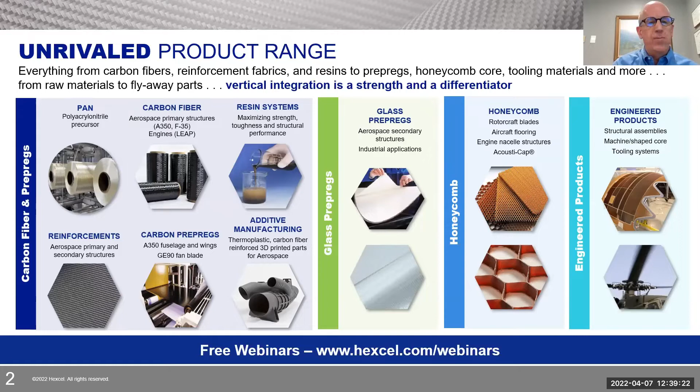And then we also build engineered structures and have two plants in Washington State. We have a plant in Burlington that is an engineered core facility where we take our honeycomb core and we shape it and form it and bond it into sandwich structures. And then in Kent, Washington, we have an engineered structures business where we build a lot of flight critical components for rotorcraft, commercial aviation, defense aviation, as well as space applications up there. And we tend to focus on very complex composite structures and have some real expertise in being able to develop that. So that's kind of an overview of Hexcel, if you weren't familiar with all of that we're involved with.

So in regards to the topic, let me first address advanced air mobility. A lot of press on this topic. You'll see it as eVTOL or urban air mobility. NASA has tried to recoin this to advanced air mobility, and it is gaining some traction in terms of that terminology. The reason that they wanted to do that is that originally it was talked about as urban air mobility, which was, as the name suggests, transportation in an urban environment. A classic example would be getting from New York's JFK airport to downtown Manhattan. And if you could do that in 15 minutes on an air vehicle versus an hour in a taxi, and if the cost were similar, there'd be an attractive market for that.

But there's a lot of other applications for this technology that is beyond urban transportation. So you think about areas that maybe are underserved; up there in the Pacific Northwest, it would be getting from Seattle to one of the islands, or Seattle to Vancouver, for example, or to Vancouver Island from Vancouver City, and so forth. Cape Cod's another market that's being looked at. So those aren't urban, but they're really just more efficient transportation. And then there's a lot of interest in this market for things like emergency transport for medical emergencies, or logistics in areas where it might be difficult to get the product there by truck, for example. So a lot of different applications.

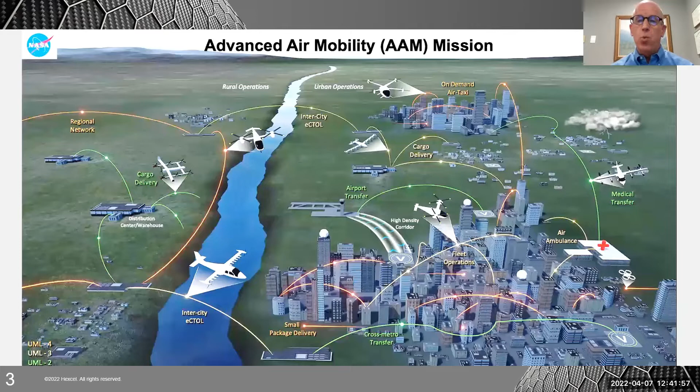As I mentioned, a lot of money flowing into this. Nobody's certified a vehicle yet, and nobody's actually purchased a vehicle. There are purchase orders in place for a lot of these companies once they certify a vehicle. But if the market develops the way the companies in this space are projecting, it will be a very large market, and it will be largely a composites market. None of these players are looking at metal airframes. They need composites for the weight efficiency, because these are battery operated, and so weight's going to be pretty critical.

There are a variety of market research reports out there that talk about the size of this market. A little difficult to predict right now because it's not a real market yet. But here's just one from one of the studies that I would say is more conservative in their predictions, showing pretty sizable growth rate, 33% market growth rate, getting up to $7 billion market by 2030.

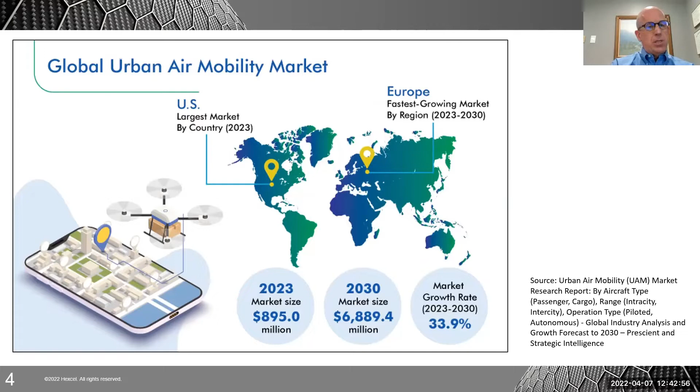There are some market research reports that show it is higher than that. But it's dependent on a number of things, as mentioned: certification, how you're going to handle the air traffic management, the business model, having the infrastructure to be able to support this kind of market. So a lot of things that still need to be addressed before this market's real. But we're excited to be part of it and to be engaged with a number of these companies out there.

Let me talk about UAV markets, because UAVs have been around for some time, but there's increased emphasis, especially within the Department of Defense, to go more towards unmanned systems. Definitely lessens the risk to pilots. The unmanned systems can be built in larger quantities, so that you could have potentially swarms of these drones out there. Even talking about some of the new fighter aircraft could be potentially unmanned, or be able to have the capability to fly unmanned. So this is kind of the roadmap from the Air Force in regards to what they're trying to put together over the next 25 years for unmanned systems.

One of the terms that now is more common in this industry is attritable. Attritable means that it's an expendable vehicle. And so a lot of focus on high rate manufacturing, low cost manufacturing, where they could pump out hundreds of these drones in a month, and to be able to support a mission with the understanding that they may only fly one mission and be destroyed after that mission, but be able to protect our warfighters and not being exposed to the danger there.

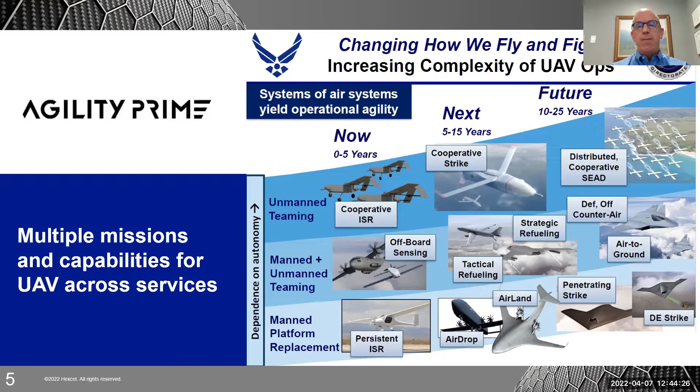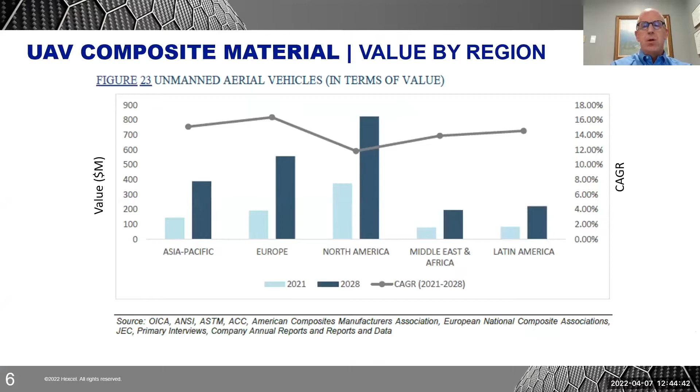So if you look at what the projections are for composite materials, here's a market research report that we purchased last year that looked at what's the composite material market potential for the unmanned aerial vehicles. And here in this chart, they've got it split out between the different regions in the world. But they are estimating that by 2028, there's a $2 billion market for just the composite materials on these unmanned systems. And you can get similar types of projections when you look at urban air mobility and even beyond a $2 billion a year market for the composite materials.

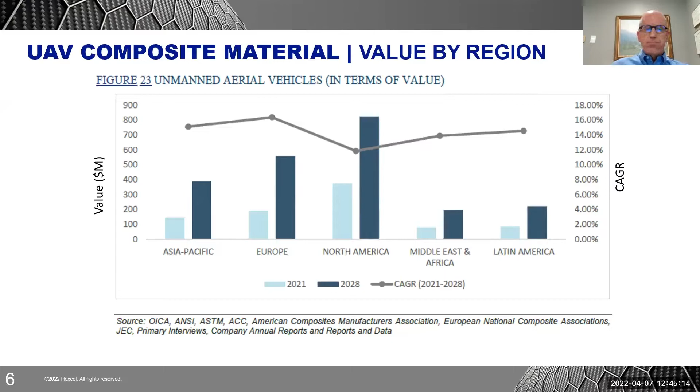So with these different markets, what we're finding is that really the mission profile is what defines the material requirements. So, for example, if you're looking at a UAV that's attritable, you're going to look at a low-cost material that can be cured very quickly so that you can pump out a lot of these in short order at low expense. Whereas an urban air mobility that's carrying passengers, they're tending to want to use established materials with established procedures on this, but are looking to the future that as this market develops, they will want to switch to high rate material systems to be able to meet their rate targets.

Some of these companies are talking about getting to rates of several hundred to possibly even a few thousand vehicles a year. So that will put different constraints on the material suppliers and the manufacturers in order to be able to meet those needs.

So here's kind of a high-level summary of what we're seeing. So on the left-hand side is the types of requirements that we're being exposed to be able to support these markets. One is they want higher build rates. As mentioned, they want to get to build rates that are beyond what we currently are used to for commercial aviation. They want lower cost. On the UAV front, they want lower cost because these are going to be expendable vehicles. On the urban air mobility, they want low cost because they've got to create a business model where it's attractive to their customer base. And as such, they need low cost vehicles.

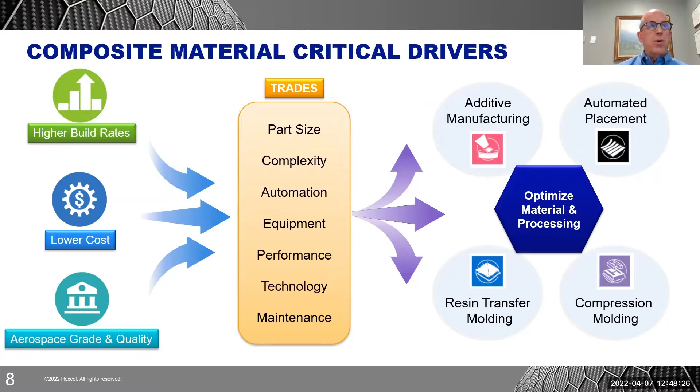But regardless if it's Hexcel or another material supplier, these are all the steps that companies have to go through, just like with any other certified air vehicle. And I'll go into some of these in a little bit more detail as we go forward. So first on this material selection. Obviously there's the common material properties, stiffness, strength, toughness that are required. A lot of these companies are startups, and so they're still actually defining what the material requirements are in regards to stiffness, strength, and toughness.

But in general, they're very focused on getting vehicle designs that are as lightweight as possible so that they can operate efficiently. Then once they've selected the materials, and actually as part of the material selection is what's the manufacturing process that they're going to use. And again, a lot of this is still unknown with these emerging markets. I would say for urban air mobility, there seems to be a trend right now, a tendency to go with more established manufacturing processes to ease the path of certification, and then to pivot to higher volume manufacturing materials as they kind of get established in the market. But all of these different manufacturing methods, as mentioned here, are being considered.

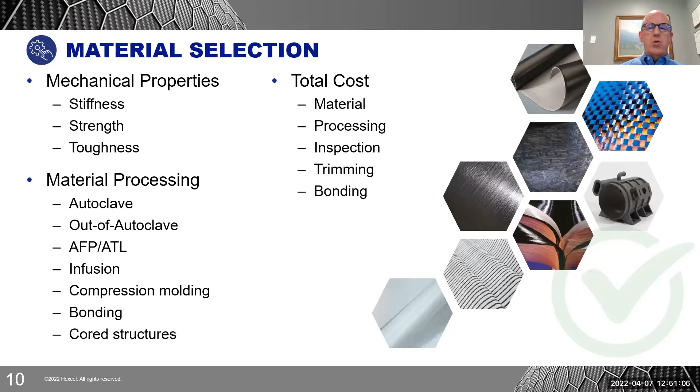And as I mentioned, there's a big focus on cost here. And what we're finding is that it's less dependent on the material cost and really looking at the total cost of materials and manufacturing. So a lot of interest in automated integrated structures, for example, to reduce the part count so that they can really manufacture these at the high volumes.

And if you look at what it takes to develop a material system for carbon fiber composites, you've got the carbon fiber activity, and there's various grades of carbon fiber out there. You have the matrix chemistry, and what you want is very good compatibility between the sizing on the fiber and the matrix that you're going to use, so you've got very good properties in translating the load from the fiber to the matrix material. So a lot of interaction has to happen between the fiber activity and the matrix activity in order to come up with prepreg solutions or other solutions that meet the needs.

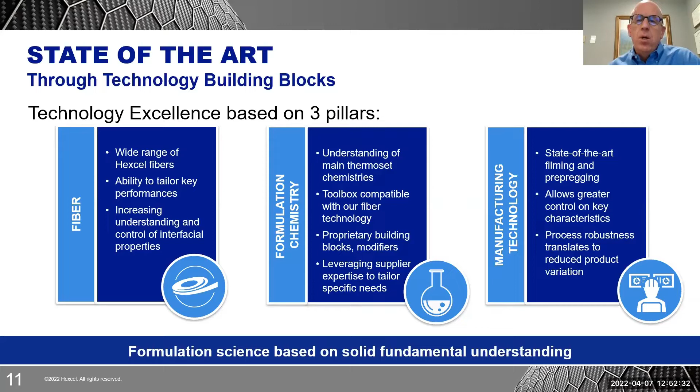And then once you have that chemistry all defined, you've got to develop the manufacturing capabilities so that you can produce these materials in high volumes with consistent quality and repeatability. And so there's a lot of manufacturing science that comes into that. So it's a very involved process to develop a new prepreg material system. And so as the requirements evolve with these emerging markets, we'll be involved in working with them in order to come up with the material performance that they need to meet their requirements.

Summary on carbon fibers, we kind of have this separated into three buckets. You've got the standard modulus fibers, which are our AS grade fibers, the intermediate modulus fibers, and then high modulus.

What we're seeing is that in the UAV market, they're primarily interested in the standard modulus fibers. A lot of that is driven by cost and the fact that these are going to be attritable vehicles. There's some interest and activity with intermediate modulus, but I'd say primarily it's in the standard modulus fibers.

Air mobility, we're seeing clearly interest in the intermediate modulus fibers, and the higher the strength, the better, because this helps them reduce the weight of the vehicle, which is important for their business case. No real interest in the high modulus fibers. As you can see, there's a drop off in strength as you go up in modulus, so no real interest from either market in high modulus fibers.

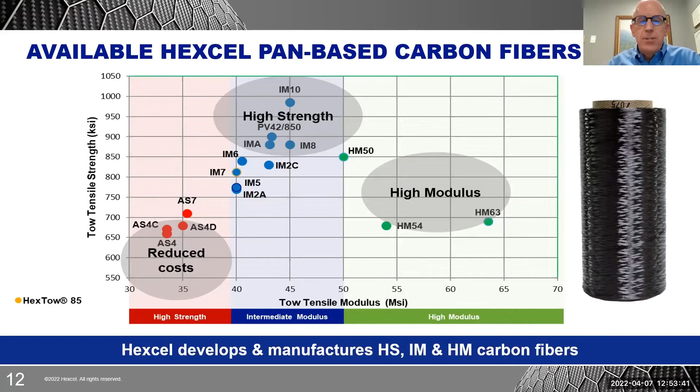On the prepreg side, we're seeing a mix of interest between thermoset and thermoplastic prepregs. Thermosets have that legacy, can be simpler for certification, and there's a lot of knowledge on thermoset prepregs out there. But there's a lot of interest in thermoplastic prepregs for future vehicles because of some of the advantages thermoplastics provide, which is you don't have to store it in a freezer, it's got mostly unlimited shelf life, and it doesn't need to be cured in an autoclave, although we still see a lot of autoclave cure of thermoplastic composites today. Once you select the material system, you have a selection process in regards to what type of manufacturing method you're going to use to lay up and cure the structure.

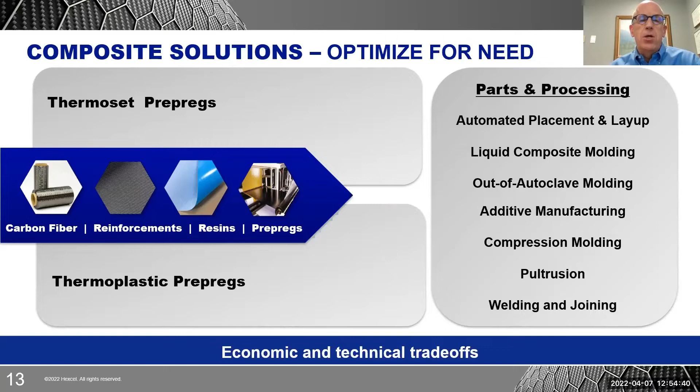One of the things we've been doing, based on this requirement for higher rate material systems, is looking at a lot of our legacy aerospace prepregs and seeing what we could do to reduce the cure cycle time. I'll talk about one of the prepreg systems we're looking at to do that. But if you could reduce the autoclave cure cycle by 25%, when you're talking about producing hundreds or even thousands of vehicles in a year, that can have a big impact on the cost of manufacturing. So we're really looking at that.

And then the other thing, reflected here on the bottom left, is that we've got a lot of industrial materials that have been produced that are high rate, out-of-autoclave systems, but generally don't have the aerospace material requirements needed for these markets. So we're looking at what we can do with those material systems that are well established in the market to improve the material properties so they become more aerospace grade.

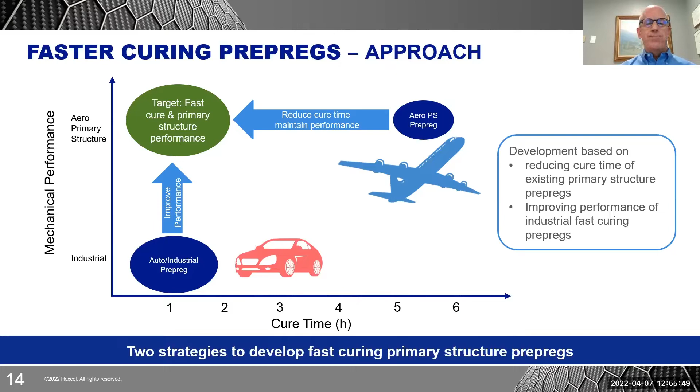So an example of one of the things we've been doing is looking at the cure cycle. This is with our 8552 material system, which has been in use in aerospace for decades. It generally has a 5 to 6 hour cure cycle in an autoclave. But we're looking at different cure profiles to reduce the amount of time in the autoclave, with a target of getting down to 4 to 4.5 hours, which provides a 20 to 25% improvement in the cure cycle.

What kind of impact would that have on the material properties? Some of our initial studies are showing pretty good results, that there's very limited impact on the material properties. You still might get 95% of the material properties with this. So we want to explore that in more depth so we can provide that as an option to companies if they want to stick with an autoclave cure material, but are looking at ways we can reduce the cure time.

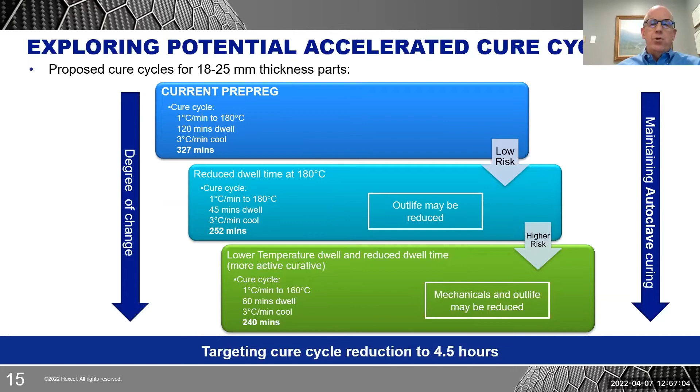On the topic of taking industrial products and seeing what we can do, M77 has been our snap cure legacy system. It's been out there for decades, used in the industrial market, generally with a 1 to 3 minute cure time used in compression molding, but it doesn't have a very high TG. So for these new market segments, we're looking at what we can do to increase it. We've got a product in development called M901, where you can get up to 190 degrees Celsius dry TG, which is in line with other aerospace material systems we have that are cured in the autoclave.

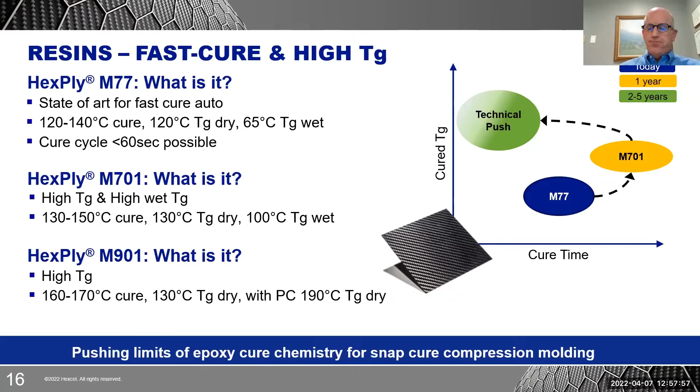There's a lot of interest in infusion. Infusion has been around for some time and used in some secondary structures in aerospace today. It provides the opportunity to develop large integrated structures and cure them in a single process.

We've got a number of infusion resins and continue to develop new infusion resins for this market. We also have dry fiber products compatible with all of our infusion resins that allow you to use automation in laying up the preform. So infusion really does hold a lot of promise.

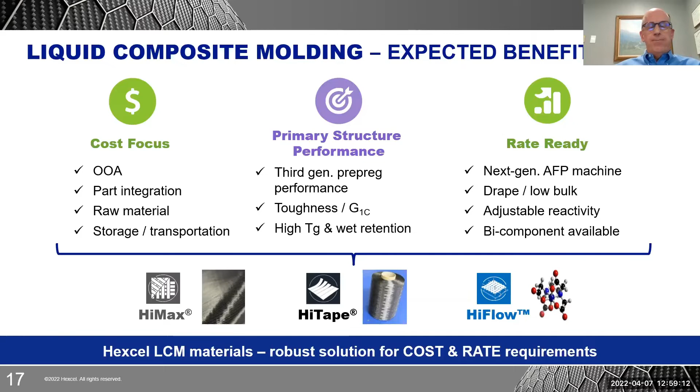Things like rotor blades for urban air mobility are a great candidate for infusion, but they're also looking at some of the primary and secondary structure on these vehicles where infusion could be used. The capital equipment is generally less intensive than an autoclave cure system, so it holds a lot of promise for this market.

I did mention thermoplastics. There are some advantages with thermoplastics. The materials themselves tend to be a bit more expensive than thermoset prepregs, but they offer flexibility, don't need freezer storage, and can be cured out of the autoclave. So we decided to get involved in developing thermoplastic prepregs a few years ago through a joint partnership with Arkema, and we're developing these materials in France currently.

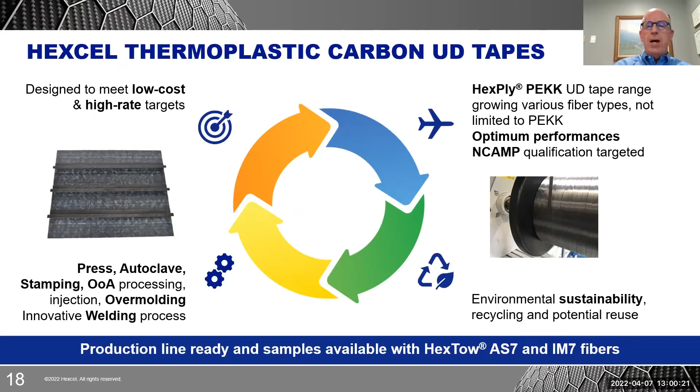We supply a lot of carbon fiber to other prepreggers that have thermoplastic prepregs on the market. There's high interest in second generation vehicles for urban air mobility using thermoplastics because of these advantages, but we probably won't see thermoplastic materials used on the first version of the vehicles, although there are some companies planning to go to market with a thermoplastic prepreg for their first offering.

We're also seeing a lot of interest in honeycomb. There's a big focus on weight reduction, and honeycomb is a great option for that. It gives you bending stiffness without adding a lot of weight. We're seeing most of these vehicles, especially urban air mobility and some UAVs, using honeycomb core structures.

The new thing we're seeing is fairly thin plies on each side of the sandwich structure. The aerospace industry is pretty comfortable with 8, 10, 12 plies on the core and the same on the other side, but what we're seeing from these newer markets is things like 2 or 4 plies with a core structure. That'll lead to additional evaluation of how we build structures with a thin number of plies in the core structure.

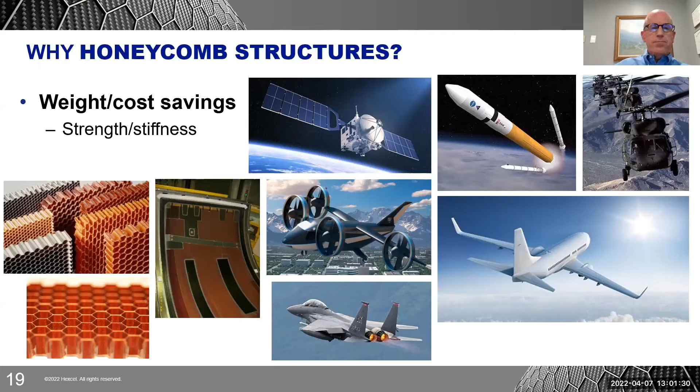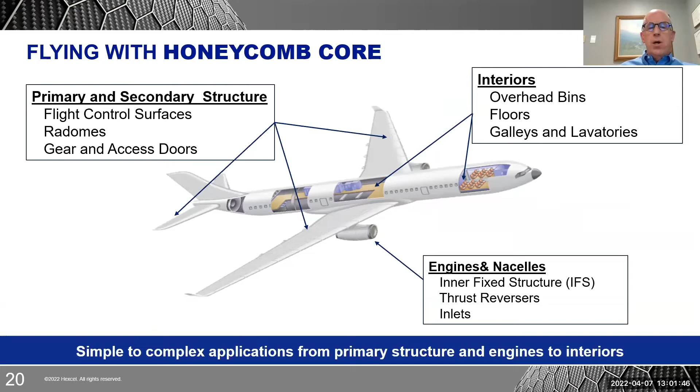Honeycomb is used today throughout aerospace and is well understood. We're currently doing an NCAMP qualification of a few of our honeycomb materials that are being used extensively in aerospace, for both interior and exterior applications.

The other thing we're seeing quite a bit of interest in with honeycomb is a product we developed a number of years ago called Acousti-Cap, which is focused on the engine nacelle market. It has sound dampening capabilities, mainly to reduce noise from the engine to the outside, and that's heavily used in commercial aviation today.

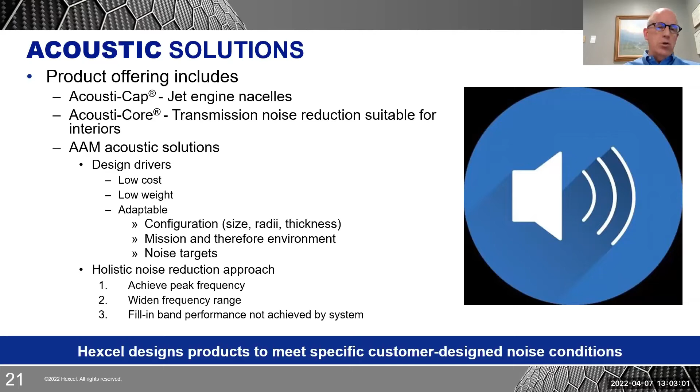We're seeing a lot of interest in the urban air mobility market in particular for acoustic solutions, because they'll operate in an urban or populated environment and need to be quiet. So I think there'll be a lot more activity in acoustic materials used in these vehicles. They're also very concerned about protecting the noise in the cabin—some companies we've talked to have said their goal would be for passengers to not have to wear headphones and still be able to carry on a conversation. So having good acoustic solutions will be important for this market.

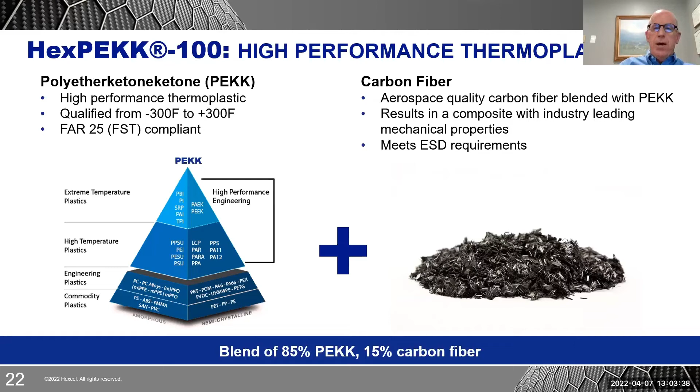I do want to touch on additive manufacturing. We got into this through an acquisition a few years ago. We are currently producing additively manufactured components using a PEKK material loaded with chopped carbon fiber, about 15% by weight. PEKK is a high performance thermoplastic, and we're seeing quite a bit of interest in this material, which is being used today in both commercial and defense aviation.

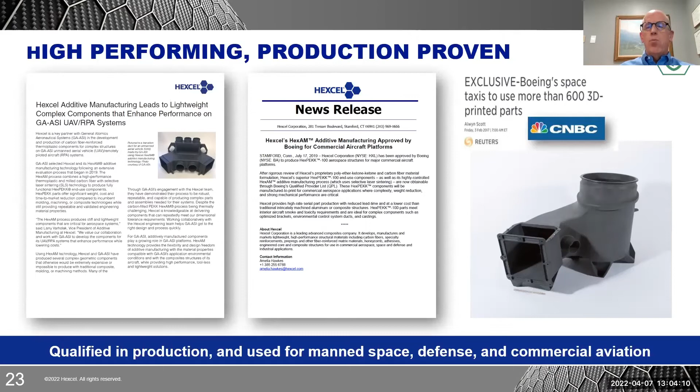We've had a number of engagements. In the middle here is our engagement with Boeing, where we're now qualified for both their commercial and defense aviation capabilities. On the left-hand side is a press release with General Atomics, a major player in the UAV industry, who are using more and more additively manufactured components on their UAVs.

These are the types of parts that we're producing. We're generally looking at ducting, casting replacements, things with fairly complex geometry where the tooling could be quite expensive. They're lightweight, structurally sound, have very good thermal capabilities that can handle a wide variety of temperature ranges. With our system, these parts come out of the machine pretty much ready to go. There's no removal of support structures, and generally the surface finish is good. So these are the types of parts that we're producing today with additive.

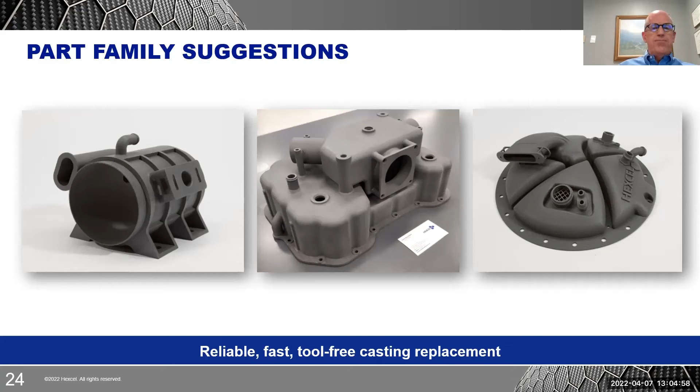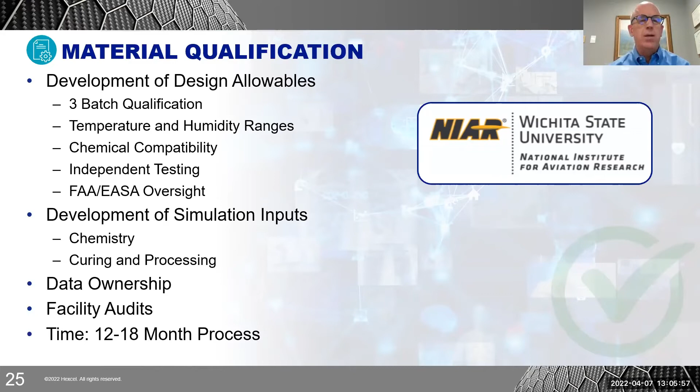Wanted to talk a little bit about material qualification. One of the things we're seeing in this market, especially with advanced air mobility, is that in the past you had OEM primes like Boeing, Airbus, Northrop Grumman, Lockheed Martin, who developed material allowables through internally funded qualification activities. But these emerging markets generally don't have any appetite for developing material qualification on their own. They want to tap into public databases of material properties. So NIAR is getting very busy from us and other material suppliers, because this market is demanding these materials be qualified through public databases, and then they just tap into those databases to design their vehicles.

Then material design and analysis. The other big request we're getting, both from this market and our legacy market, is that they not only want the material qualification data, but they want it formatted so it's ready to plug into simulation tools being used today. We've been very active in developing this material data set, formatting it into the formats required for different analysis tools. That includes process simulation, like resin transfer molding simulation and autoclave cure simulation, having all the material data to allow our customers to do those simulations. And more and more, virtual material characterization before they commit to the physical material and all the physical testing required for qualification.

How much of this can they do virtually? So they can start using virtual material qualification data prior to the physical qualification being completed, so they can move fast in their design studies. Also being able to provide all of the material properties to the structural design and analysis teams who need to design vehicles with these materials—they want A basis or B basis allowable data, formatted appropriately for the different simulation codes they might be using. In fact, some customers have said they will only consider new materials from Hexcel if it comes with a digital data set. So we're active here, and this is a demand coming from these emerging markets for a full set of digital simulation tools.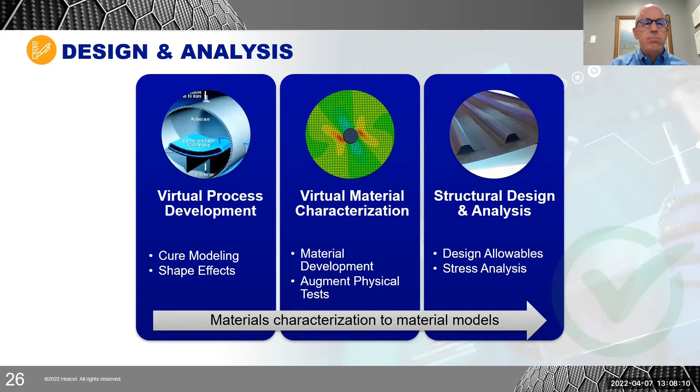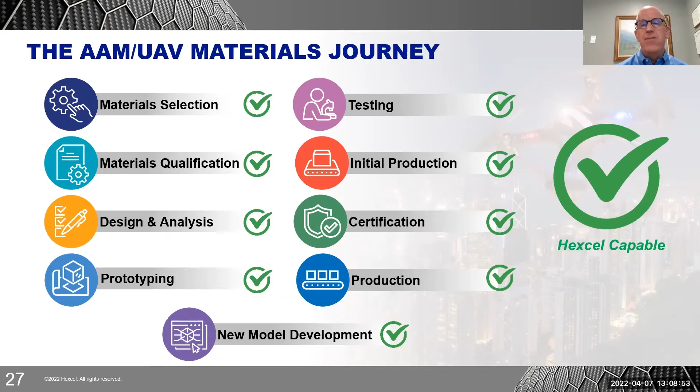I shared this before, I'm just repeating it here about the number of steps. When you look at these emerging markets, they're generally in the material selection to prototyping phase. Some are starting to move into the testing phase, but there will be a lot of activity over the coming years in setting up initial production, certification, and full production of these vehicles. We hope these markets are very successful. It's a big boon for the composite materials industry in general to have these new markets and the volumes they're talking about, and to get more people comfortable flying on vehicles that are heavily composite.

I wanted to address a couple of other issues before we move into the Q&A. One is the supply chain. Let's say advanced air mobility is successful and they get to rates of thousands of vehicles produced per year—that is really going to stress the current supply chain for composite structures. So there's a few things happening. Some players in advanced air mobility have engaged with automotive companies: Joby has a tie-up with Toyota, Fiat Chrysler is an investor in Archer, and Hyundai has entered the mix. They've rebranded this to Supernal, but it's a wholly owned subsidiary of Hyundai. General Motors has expressed interest in getting into this market. You also have the aerospace suppliers—Boeing has teamed up with Kitty Hawk to create Wisk.

Airbus has announced plans to get into urban air mobility. Honeywell, Bell, Spirit have all announced interest in this market. So the big question is: how's the supply chain going to evolve?

Is the automotive supply chain going to step up their composites manufacturing capabilities to support this market? They definitely have the experience in high rate manufacturing, which is important. Or will the aerospace market step up to increase volumes and capacity to meet this market? Because the aerospace industry has the knowledge and expertise of certification.

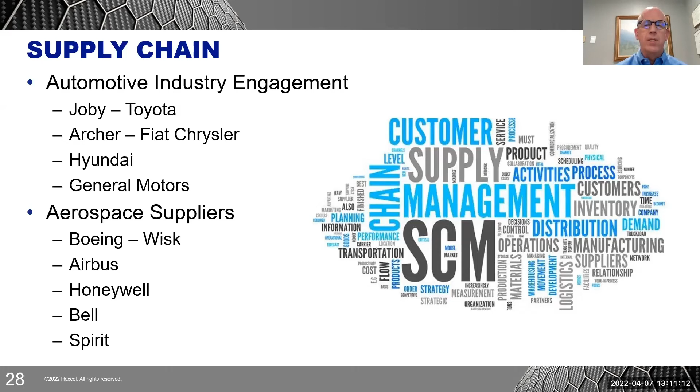And being able to manage the process of qualifying production facilities for aerospace applications. Or will a new supply chain emerge? Too early to say. It might be a mix of all of these, but it's an important area that I know both the Air Force and NASA have been looking at, to say what's needed to support the supply chains to meet the requirements of these emerging markets. So again, is it an automotive supply chain, an aerospace supply chain, or a new hybrid supply chain that will emerge here?

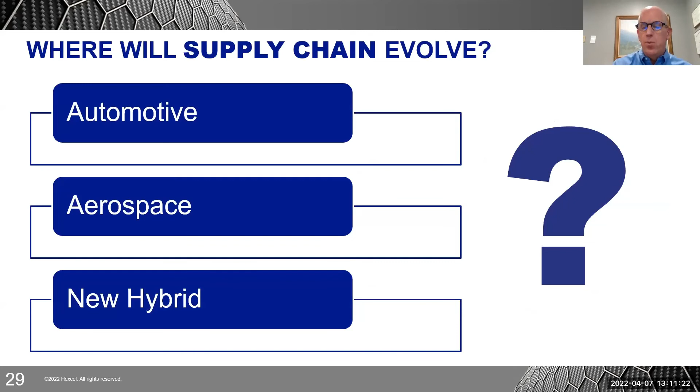Many of these companies are in that early stage, in that prototyping stage, material evaluation stage, and often they only need a very small amount of material to be able to do that. And we were constrained a little bit in being able to support that market.

So last year we set up two distributors. One's in Washington State, Heatcon, the other is on the East Coast, that are now stocking prepreg materials for these markets, and they can supply these materials in small quantities and on demand. And we'll continue to support these distributors, and we've got a very flexible arrangement with them in terms of the types of materials that they stock.

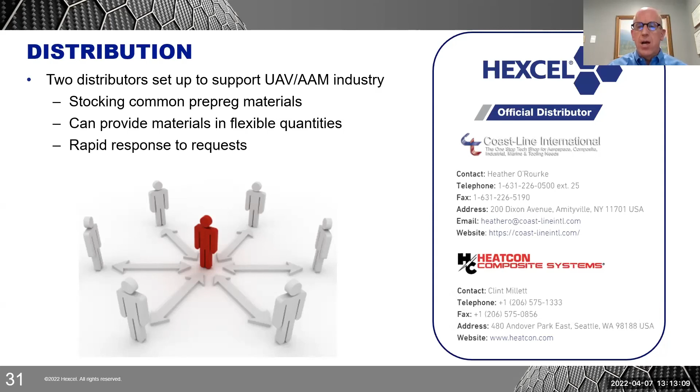Currently, they're stocking 8552 materials, which is a legacy autoclave cure epoxy resin system, and then our M77, which is this snap cure material system that's being used more and more by the UAV industry. And we'll change the mix of the materials, but wanted to alert this crowd that we've got that set up now in order to support the materials needs for companies that are in this early stage and only need small quantities.

And then the other thing that we announced last week is that we also see a lot of interest in this market for prototyping and engineering support. So I mentioned our Kent, Washington facility, which is great for production work, but we really don't support prototyping or engineering for that. And so we've now partnered up with two companies, Fiber Dynamics in Wichita, Kansas, and Rebuild, which has several sites throughout the US, who have a lot of capabilities for prototyping and engineering support. So for these emerging markets, they are our partners that can help with those activities as these companies are developing their designs and getting them certified and getting the prototypes manufactured.

So in summary here, these different markets do have different material requirements, so it's not a one-size-fits-all type of market. UAV has very different requirements than urban air mobility and so forth. So we want to engage with companies and help them make the right material selections depending on what their market needs are and what their technical requirements are.

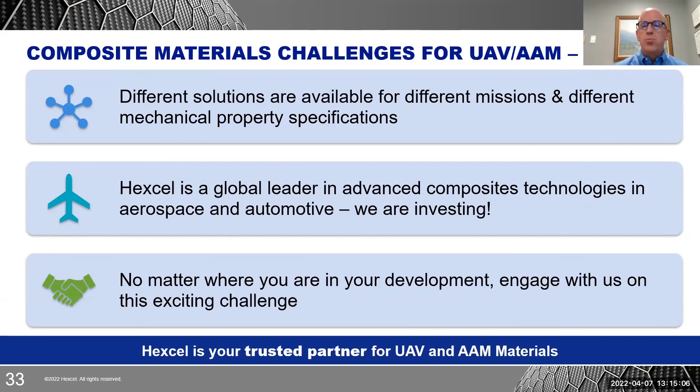We are a global leader in advanced composite technologies, and continue to invest. We announced last year that we're building a brand new state-of-the-art research and technology facility in Salt Lake City that's supposed to be completed at the end of the year, so that we can continue this activity in developing new material systems that will meet the needs of these new emerging markets. And we're happy to engage with companies at any stage of the process, and to be able to support you as you go through this journey.